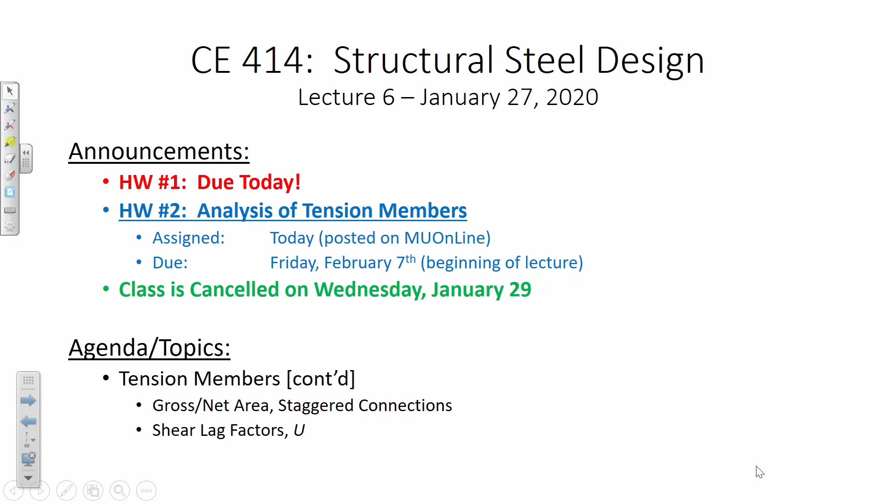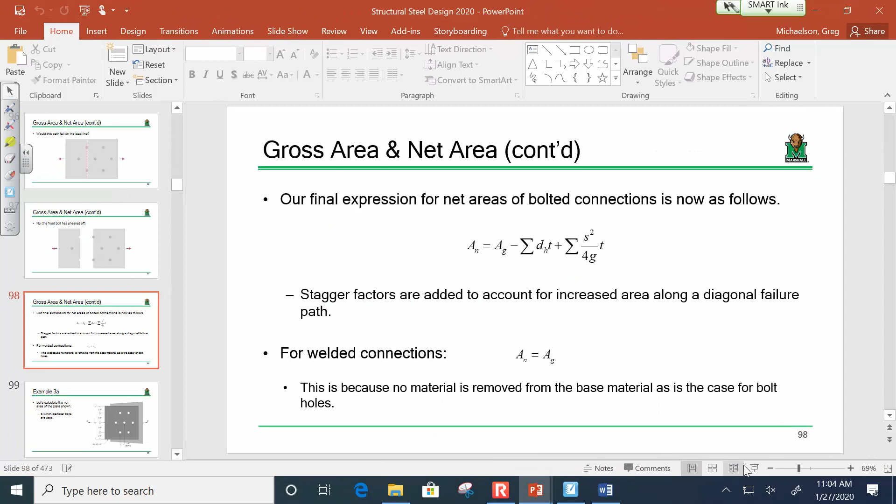Okay, so we're going to get back into section property computation, specifically gross and net area. Let me sort of backtrack. Last time we began the discussion of, well, how do you define the capacity of a tension member? I've got a piece of steel, I'm yanking on it.

How do I determine how much load that member can carry before it fails? Well, it's a function of what limit state you're looking at: the yielding in the gross section, the fracture in the net section, and so on and so forth. But it's also a function of the member itself and its various section properties. Namely, if I cut a section through a member, we're using sigma equals P over A. Well, what's A? It depends on if you're cutting through the gross section or the net section.

Now the gross area is usually pretty straightforward. You either compute it or you look it up in your AISC 15th edition steel construction manual that everybody brought with them today, right? Or you can compute it. That's the gross area. But the net area, there's a little bit more nuance to it.

First off, if you're dealing with parallel bolt paths, you have to recognize that your hole diameter is 1/8 of an inch larger than your bolt diameter because of various reasons we've discussed. Either you have to drill it larger, and B, we eliminate that little bit of a lip of material around the hole analytically.

But then there's also the discussion of staggered bolted connections. Remember, I'll go back a few slides. So we're always checking for a staggered connection along the lead line.

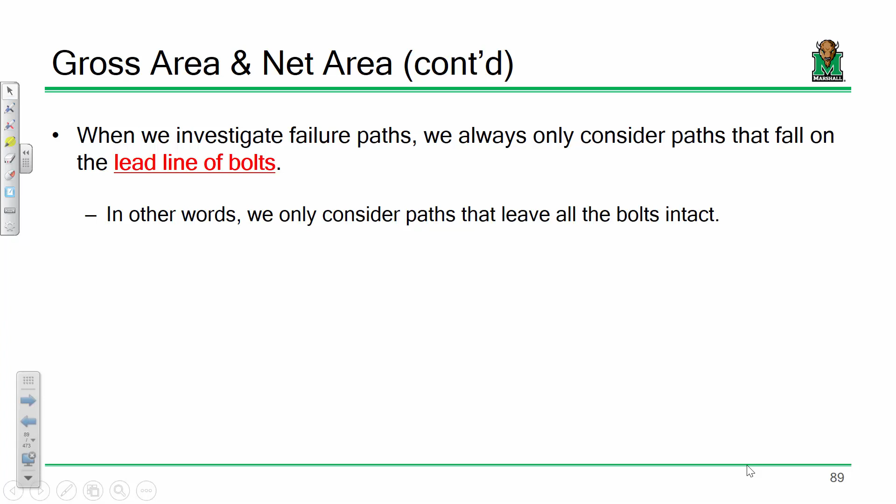Remember, the idea is that here's my tension member, the main body, the gross section, all the way over here. So imagine if you took a rubber band and stretched it along that member.

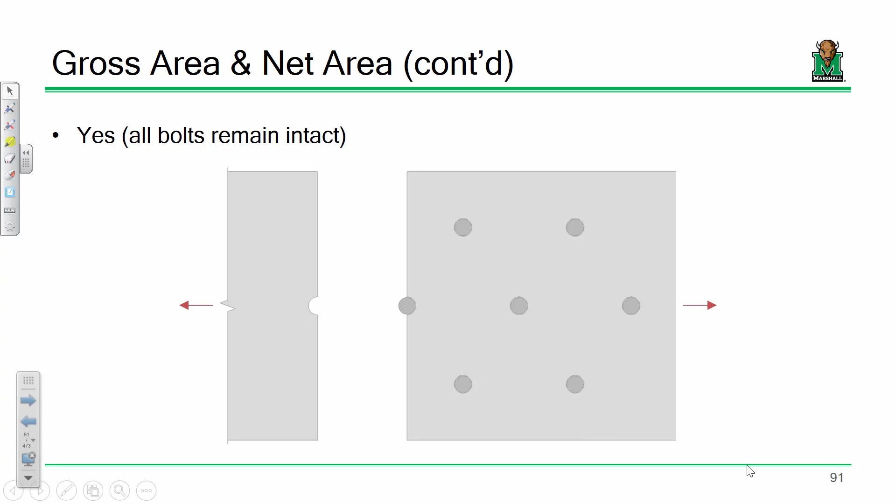The bolts that it hits, those are the lead line. So would this path fall on the lead line? Yeah, because the bolts remain intact. With this one, yeah, because all the bolts remain intact. With this one, again yes, all the bolts remain intact. But with this one, no, because the front bolt is sheared off. So we're always going to limit our discussion to lead line paths. Okay? So far, so good?

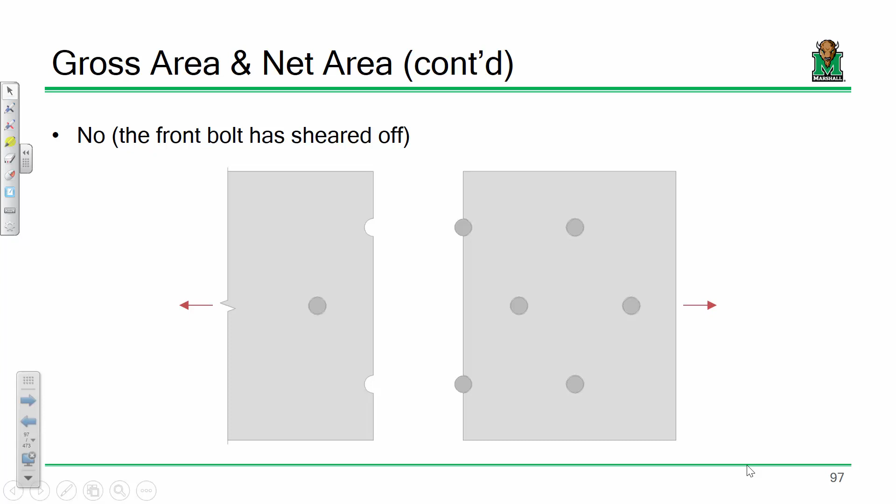All right, now let's see. So here's our fundamental expression for the net area. This is a more general one that you could write down in your notes. I have a summary of relevant formulas here in a bit, but this is one that you could hang your hat on. This is the net area formula: gross area minus the area loss due to bolt holes plus any stagger factors. And we add the stagger factors because a diagonal path would have more area, so it increases the net area. And that's for bolted connections.

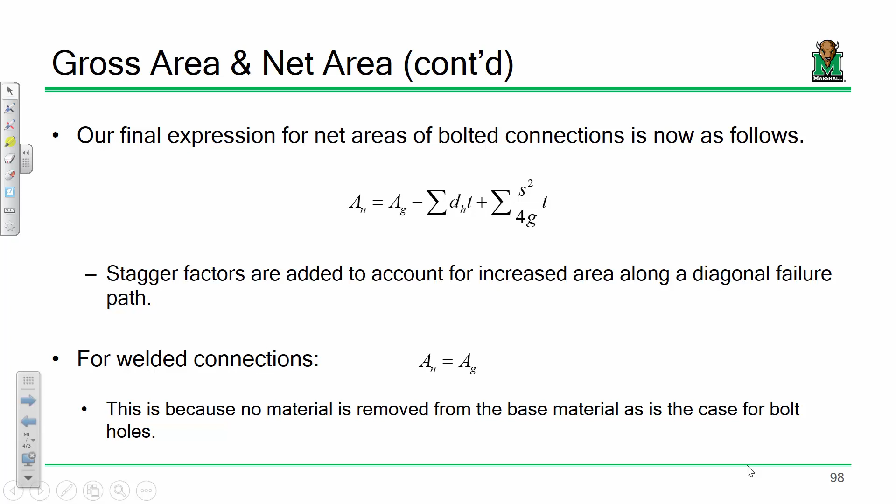For welded connections, as you know, you're not removing any material, and I'm talking about fillet welded connections, the net area equals the gross area. So with that, we've got our net area path shown.

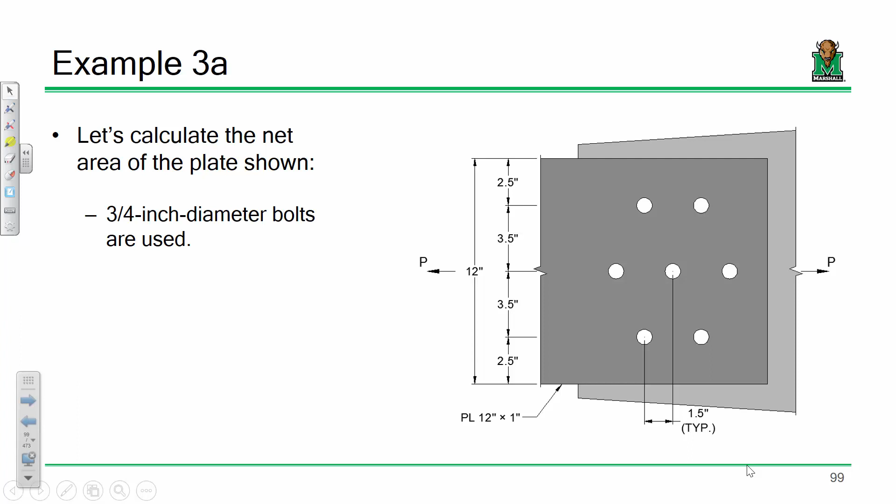Remember, S is parallel to the load, G is perpendicular to the load. So that 1.5 inches, is that the S or the G? Yes, that's S, that's the stagger. So what is the G for these diagonal failure paths? I'm asking you. Exactly right, 3.5. So between bolt lines, that dimension is 3.5, and that dimension is 1.5. Does that sound good?

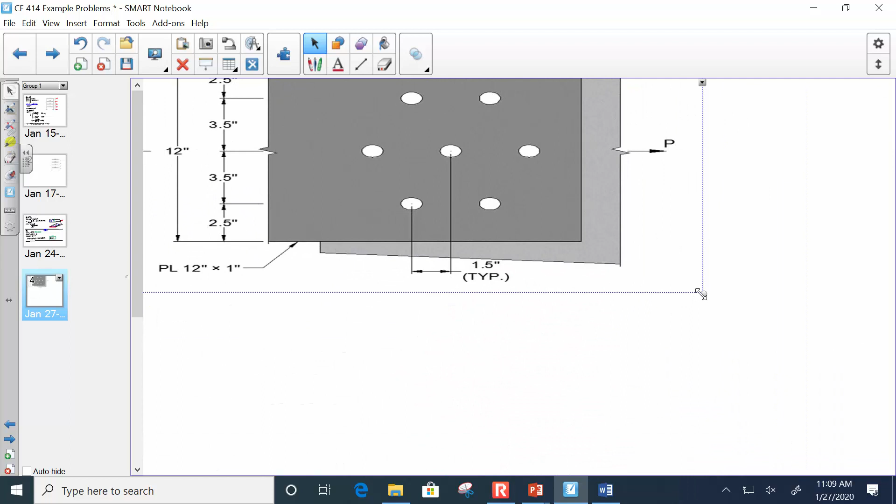All right, all right. So I'm lazy, every time. I'm actually going to stretch that out a bit so it's a little easier reading. Oh my, that's a bit too much. That's good.

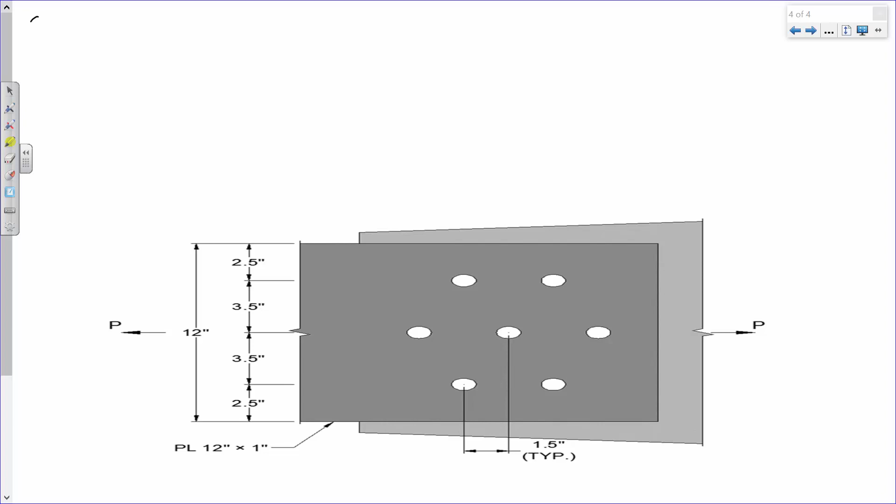Okay, so here's our problem. I'm actually going to move that down a bit. Example 3A. So before we start identifying failure paths and things like that, let's compute a few basic quantities.

Let's talk about the gross area. What is the gross area of that plate? This is an easy one. That's pretty good.

Anybody got it? Let's talk about—all right, so here's the plate. Okay, so let's make sure that we're clear on this. So here's the plate, and so it sort of goes like that. And so what we're seeing is sort of this thing. Right? And so if I looked up top, maybe the plate looks like this. And so here on the end, I've got this whole thing, or that whole thing. And then the main body of the member goes all the way out.

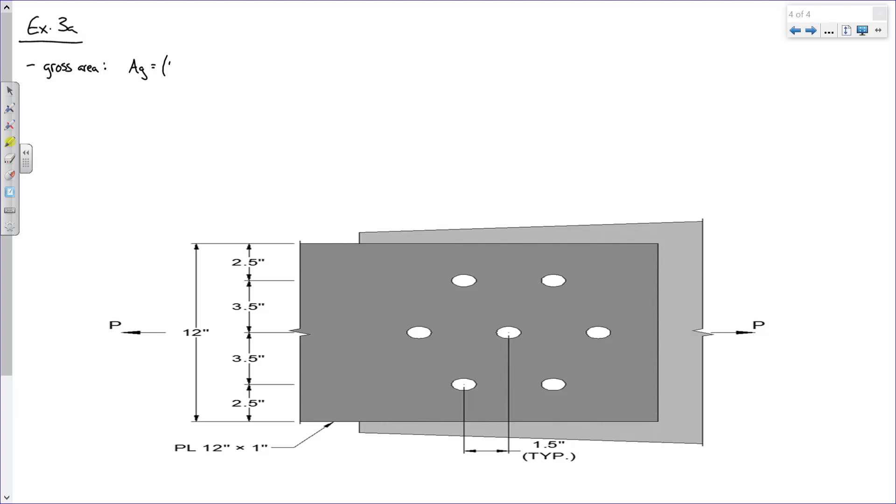Now the gross area, I'm talking about samurai swording or lightsabering through just the main body. So if I cut through that plate and look at it, what is the area of that plate? I promise it's not a trick question. Isn't it just 12? 12 what? Inches squared? Yeah, it's just 12 times 1. It's pretty straightforward, because the plate is 12 inches by 1 inch. I promise I'm not trying to trip you up on that. It's simple. Okay, is everybody okay with that?

Okay, all right. Now let's also look at the bolt holes. So the diameter of the bolts—what were they for this problem? 3/4. So the hole diameter is the diameter of the bolt plus 1/8. So that's 7/8.

And since that's 7/8, what we could also say, if we wanted to make that a little easier, is the area of the hole is the diameter of the hole times the thickness. And we're afforded the opportunity to compute a single hole area because all the hole areas are the same—they're all going through the same plate. If it was an I section or a wide flange, and you had bolts going through the flange and the web, you couldn't use the same quantity because they have different thicknesses. The web might have a different thickness than the flange, but because it's a single plate, they're all the same.

And remember, it's the diameter times the thickness, right? Because if you cut through that section, for instance, you're going to see this plate, but then that area is going to be removed. And the area of that is the diameter times the thickness, okay? So this is 7/8 times 1, and just to differentiate, this is 0.875 inches squared.

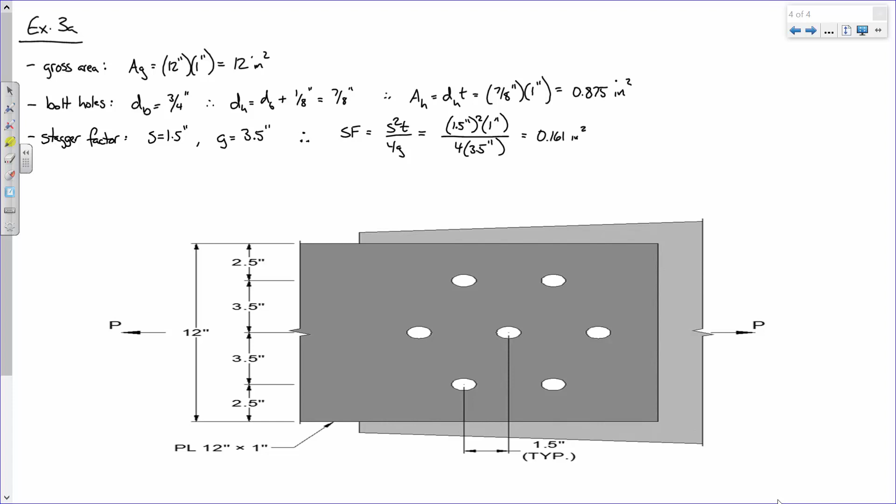Now, what I'm going to do is throw some terminology out, identify a couple potential regions, and you all are going to help me identify some failure paths. So we'll say, we'll call this maybe point A, call this point B, call this hole C, call this D, call this E, call this F, call this G. The reason I'm doing that is because I'm going to draw a bunch of lines identifying all of the potential ways that this could go.

Like we could have maybe some stuff like this, that—a bunch of different diagonal lines indicating where this stuff could lay out.

All right, here's what I want you all to do. Let me move this over. Let's look at possible failure paths. Possible failure paths. I want somebody here to look at this terminology that I've thrown out at you.

Let me be clear. For your homework, like the first problem, I threw out the letters at you. For the second and third problems I did not, so you have to identify this yourself. I'm easing you into it. All right, somebody look at this terminology and identify a potential possible failure path.

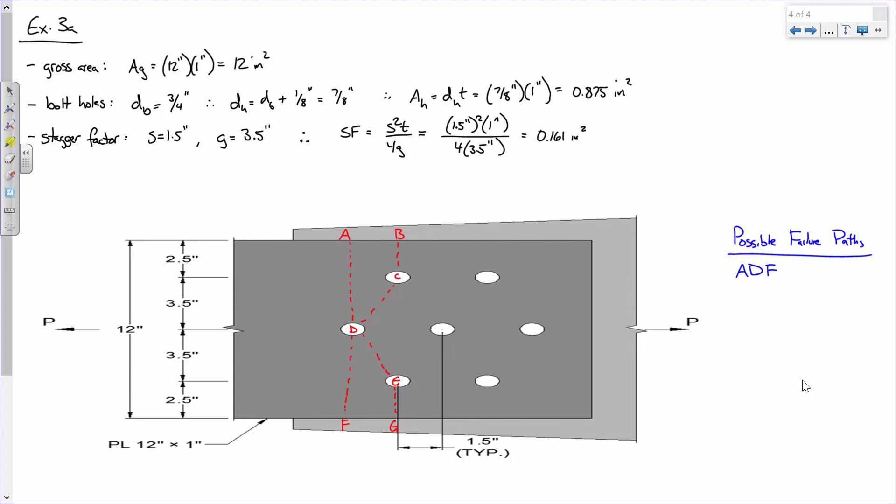A-D-E-G. A-D-E-G, exactly right. Now, analytically, that is different than ADF. Why? Because we have how many bolt holes that we're subtracting for this one? Two. And how many stagger factors? One. Okay, keep that in mind.

Is there a path that's kind of like that one that we could also name? There's A, D, E, G. What about another one? There's one that's kind of like it. BCDF. B, C, D, F. Now, A, D, E, G: how many holes? Two. How many stagger factors?

Now the next one that you mentioned, B, C, D, F: how many holes? How many stagger factors? So are they really different paths? No, in fact really they're the same. So I'm going to say they're basically the same path. Now that is not always the case. Okay, sometimes they wouldn't be the same.

And a particular instance where they wouldn't be the same is if this distance is different than this one. And you're thinking, oh come on Dr. Mike, who the heck would do that? Well, there is a very specific example where that could happen, here in a second that I'm about to show you. So don't worry, it can happen.

Would that 2.5 inch distance affect it as well if it was different? What do you mean, if this was 2.5 and this was 3 or something? Yeah, that's a great question, and the answer would be no, because that's not distance between bolt lines. Because your diagonal path is defined by the 1.5 and the 3.5. So whether this is 2.5 or 76, it really wouldn't matter. But if there was another bolt line down here, then yes, it would matter. That's a great question, so is everybody okay with that?

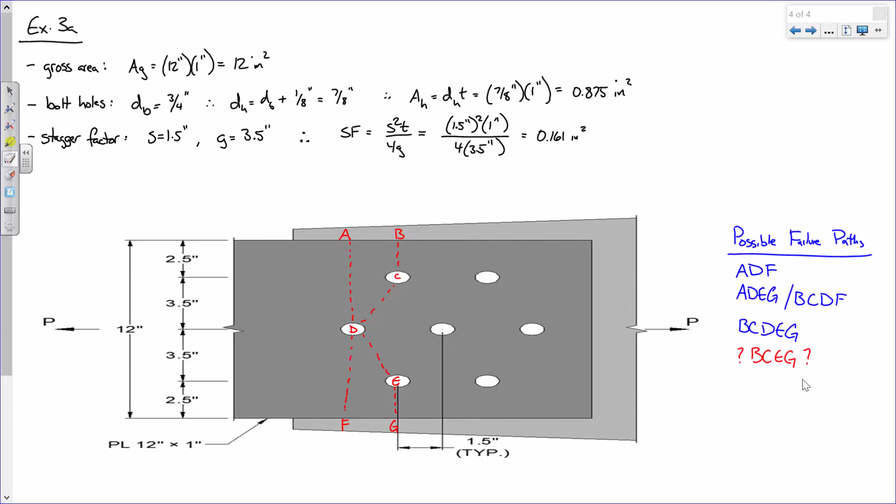Now once you've identified the possible failure paths, the rest of this becomes pretty easy. So watch this, all right? So don't forget, we have a gross area of 12 square inches. We have a hole area of 0.875, and we have a stagger factor of 0.161.

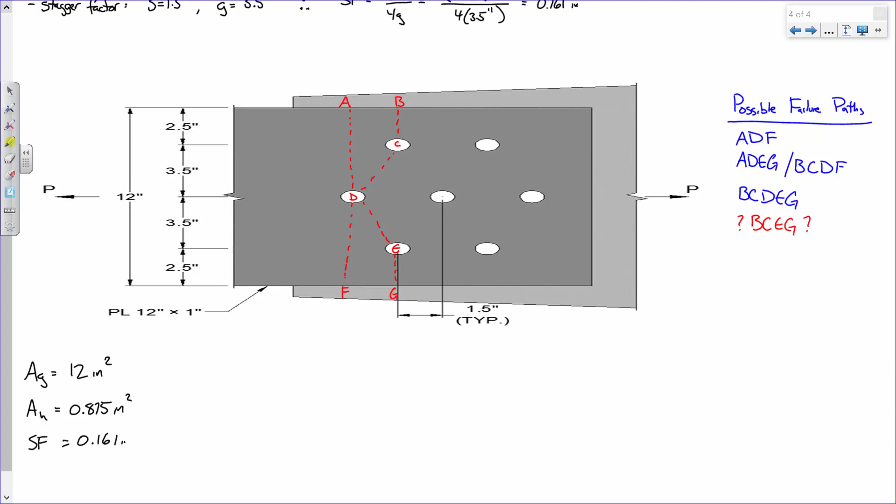Just remember those values, you don't have to rewrite them. I'm scrolling down, so I just wanted to have them off to the side. Okay, I'm going to draw myself a little table. Now remember, the net area formula is the gross area minus our hole areas, plus our stagger factors. I don't need this.

Okay, so here's how I'm going to do this. Let's draw ourselves a little table. All right, and so we had three of them that we identified: A, D, F; B, C, D, F; A, D, E, G; and B, C, D, E, G. And then we have our bolt holes, which were subtracted, and then our stagger factors, which are added. Then we have our net area.

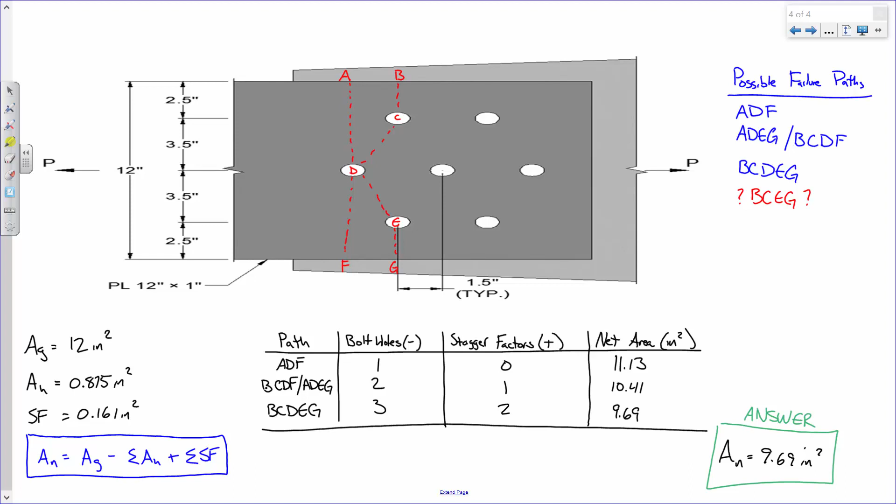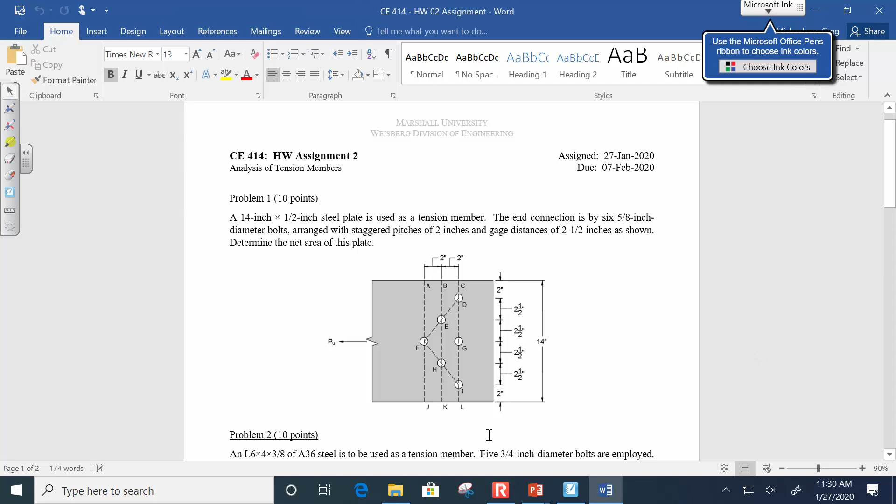Okay, I really want to make sure that's clear, because if you understand this, then the first problem on the homework is straightforward. Here's the problem, and what I did is, for this problem, so that we're all speaking the same language, I label everything. So everything's got the letters, but if you notice on future problems, there are none. So you sort of have to identify it yourself. So it's like this one is so that we can all speak the same language, but in future ones, y'all gotta figure it out on your own.

Does that sound good? Okay, so this one, I'll go ahead and tell you, there are far more failure paths than what we just did. I think there's like six or seven of them. And so the purpose of this problem is for you to identify them all. And so there's a pattern, and you'll start to notice that pattern pretty quickly, and you'll go, okay, I know what the answer is. And that's fine, but it's all about identifying those particular failure paths, okay?

And so that's my first point. My second point is I will go ahead and tell you one hint. Let's say that you're looking at that path. Is it one stagger factor or two? It's two. Each of these is separate, okay? So keep that in mind. You can't use that gauge and that S and compute a single stagger factor for the whole thing. No, each of those are different. And it's because you've got this term squared, the math doesn't work out right. You have to treat each one separately, okay? So I'm just telling you that now so that you're aware of it.

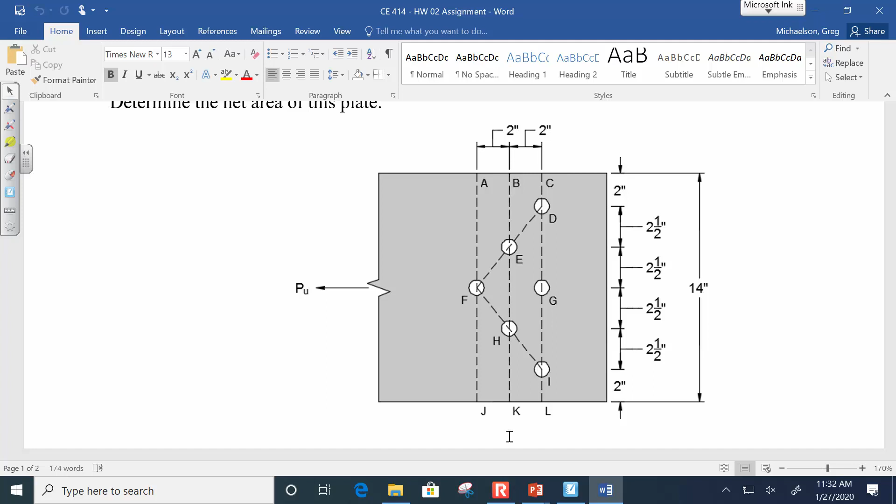Everybody okay with that? Any questions? Yes, sir, on the example we just did. Could you explain again why there was one path that wasn't, like we wouldn't consider it as possible? Oh yeah, okay, I will go ahead and show you why. It's a little weird, but I'll show you why, okay? Here's the idea. This is the idea. And like I said, it's a little weird, so bear with me. Okay, how many bolts are in this connection? Just how many?

Would you agree that each bolt withstands 1/7 of the load? I'll tell you, it doesn't actually work out like that in reality. Anybody who's worked on a lawnmower or done mechanical work knows that if you have a connection with a bunch of bolts, some bolts are more engaged than others. That's just how it works. But for the sake of our discussion, it's close enough.

Let's say we're looking at path BC, EG. That's going to be the gross area minus 2 holes, right? Somebody tell me what that is. I'm just curious.

We got an answer? 10.25, now a second, okay.

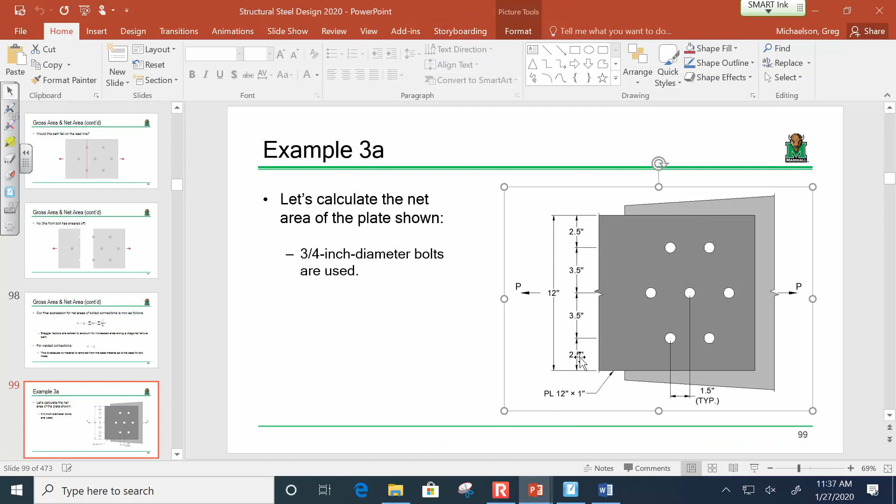Okay, now we did one that's a plate. Now we're going to do one that's a rolled shape. We're going to look at the following staggered connection. This is a staggered connection along an angle. This one's a little weird.

First off, that means we're going to need this, because everybody brought their AISC 15th edition steel construction manual, right?

Yes, it's like, he won't call on me if I sit next to somebody that might not bring one. Still call on me, but at least I'm... No, he was 100% prepared, so I prepared for class stuff. So I didn't sit up there and worry. You're going to do awesome in senior design.

I'm messing with you. All right, so here we're dealing with a rolled shape, okay? This is an angle. We haven't discussed much the terminology behind angles, but there's not a lot to discuss. This is an L7 by 4 by 5/8. So whenever you're looking at angles that have unequal legs, you always denote the longest one first. So it's 7 by 4, the long leg is 7, the short leg is 4, and the 5/8 is the thickness of the plate.

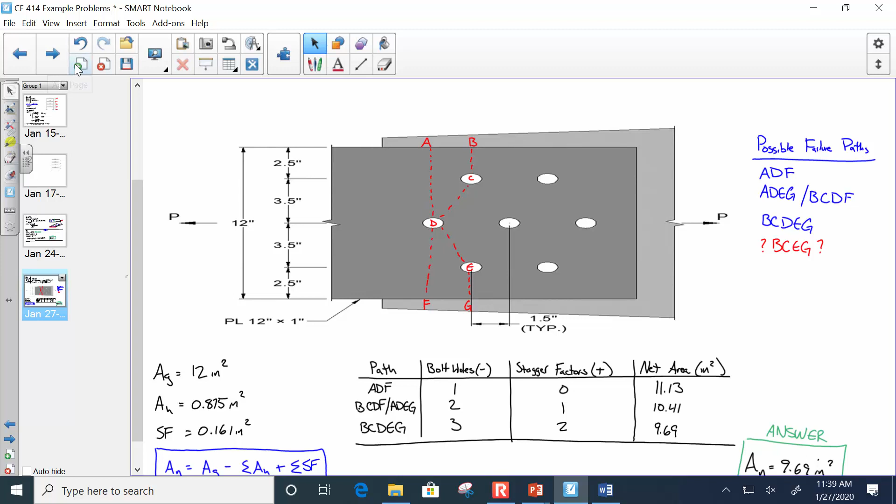So here's how I'll do this. I'll say for an L7. And that's table 1-7 on page 1-44. Now I want everybody to be at the same spot, so I want to make sure everybody's able to find that value.

Again, I know this seems simple, but part of the point of this class is to make sure everybody's comfortable with the manual. That's the whole point. I know it might seem silly that all we're doing is looking at numbers, but by the time we get to week 8 and week 9, we're not going to do this look-it-up-together thing, because by then you'll be pretty familiar with this. So especially, you'll have homework assignments and things like that.

Sound good? Okay, since I don't think we really need to look this up, but what's the thickness going to be for this problem? 5/8. Yeah, it's 5/8. That's the whole point of the terminology. So, not necessary to look that up, but it's there.

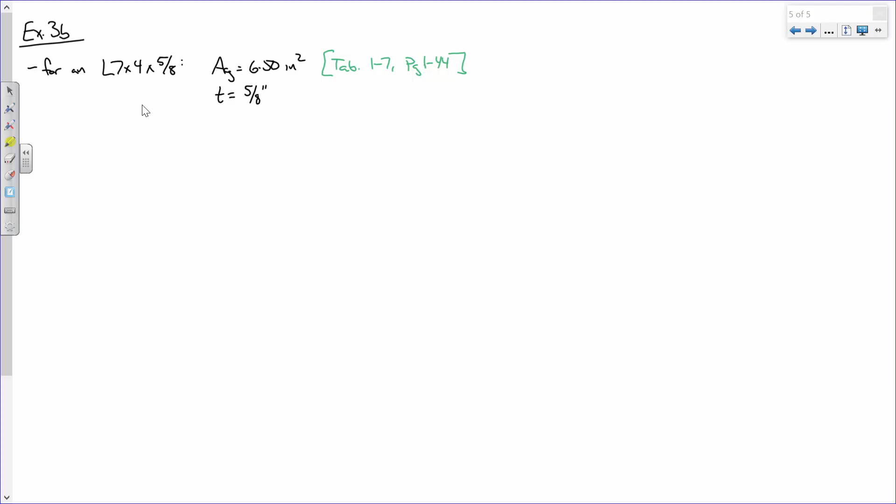So the diameter of a bolt, is it 3/4 inches as well? I think so. So what's the hole diameter? Let's just keep this simple. 7/8.

So the hole area is the diameter of the hole times the thickness, so 7/8 times 5/8, and that equals. And when you're doing your homework, I'm okay if you do this all in one calculation, like 3/4 plus an 8th times that. You don't have to follow this format, just as long as you do it correctly and do it neatly. As long as you do it correctly, do it neatly, and use the right terminology, I don't care how you do it.

So we'll say 3 decimal places for our purposes here. The only reason I say 2 to 3 decimal places is usually because that's enough specificity so that we know what number we're talking about. Like if you just said 0.5 or something, it'd probably be good enough for design purposes, but then there'd be a bunch of 0.5s running around and we wouldn't know what value we were talking about. So 3 decimal places, what we got?

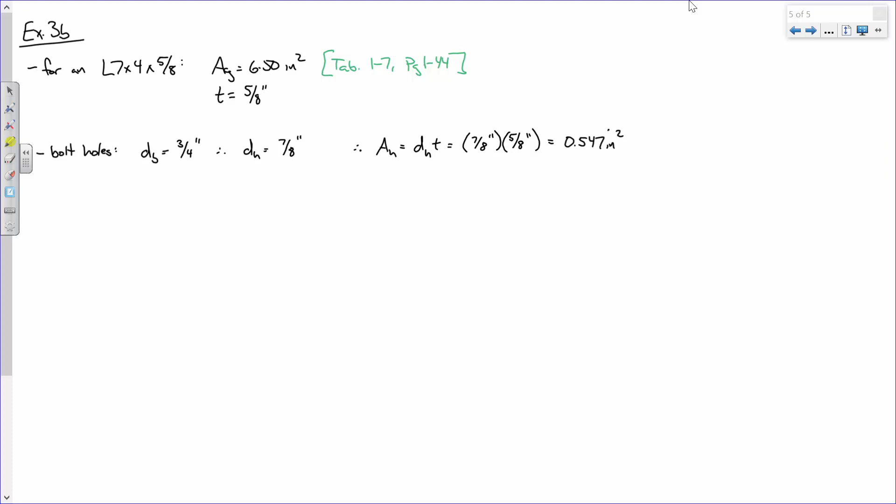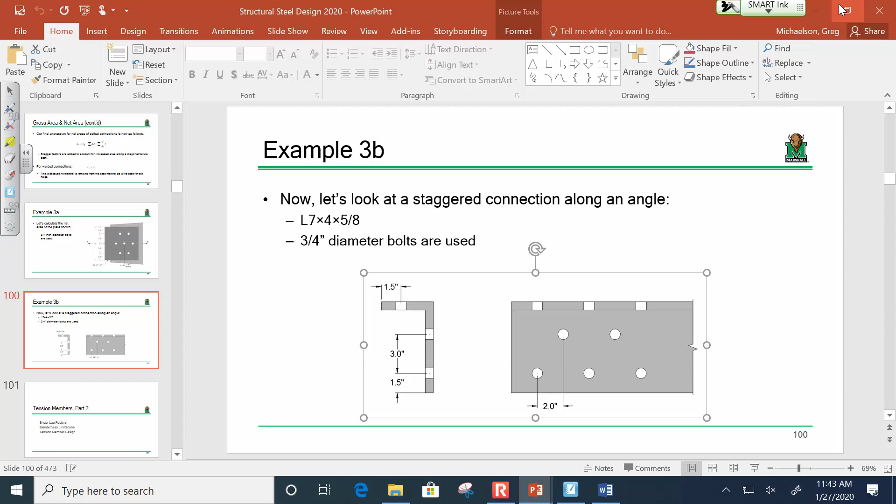Okay, now this is where things get a little funky. And we're not going to finish this problem today, but I'm going to show you what we're going to do, and then we'll digest it. We'll tackle it on Friday.

What is the S value? 2 inches, right. Okay, now does that matter whether or not I'm talking about this path or that path? No, the S value is always 2 inches, right? Now the gauge distance, though, that one's a little unique, isn't it? What's the gauge distance here? Exactly 3 inches. 3 inches, exactly right.

What's the gauge distance here? Is that the 1.5? No, it's not. The 1.5 would be sort of from here to the edge. I'm looking for a gauge distance across here. That's a little weird. How do you do that? Because it's the stagger across the legs, right?

That's a little strange. So, because it's a little strange, I am going to make it not strange. And how am I going to do that? I'm going to break out the samurai sword or lightsaber. And what I'm going to do is, I'm looking over here, I'm going to samurai sword or lightsaber through there, and I'm going to take this and stack it on top. And I'm going to turn this angle into a single plate. I'm actually going to perform some surgery to this angle, if you would.

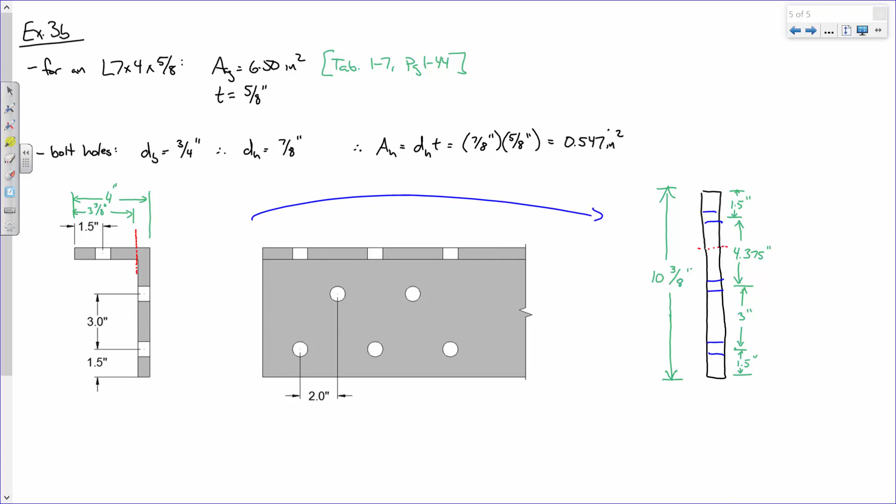Don't worry, we're not done with this example, we're going to continue it on Friday. I just want to point out something really quickly before we close it, just to show you a shape of things to come.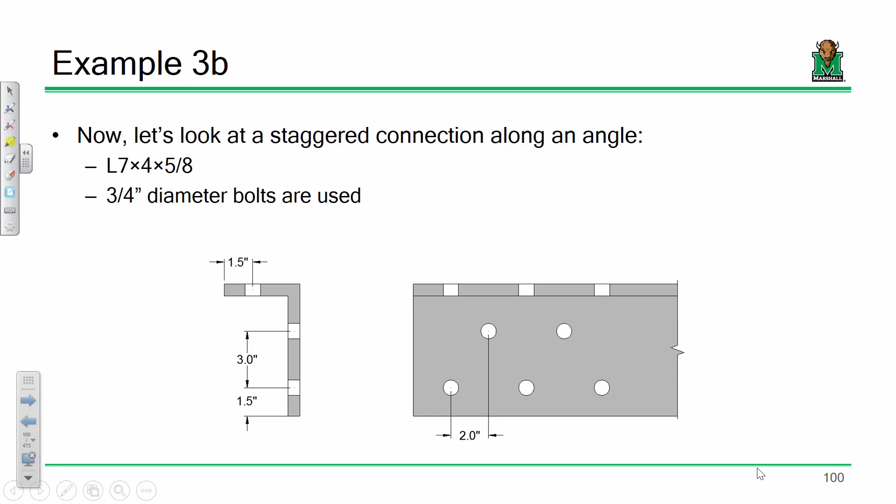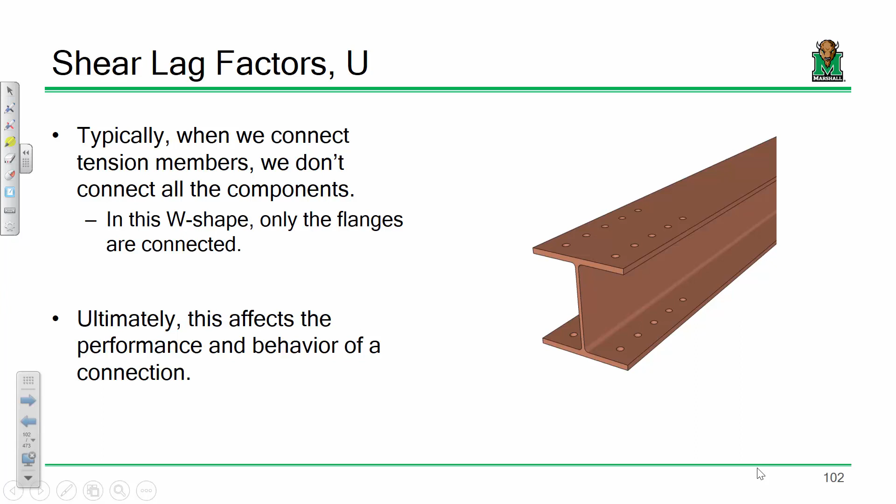What we're doing right now is all about gross area and net area. I told you that when you take your first exam, there's two things that's going to confuse you. One of them is net area, the other is shear lag. Shear lag is something we haven't talked about yet, but we're definitely going to dive into on Friday. In a nutshell, shear lag factors are basically trying to account for real-life behavior on a connection. When you look realistically at what the stresses look like along a connection, they're weird. They're not simple, okay? They're all over the place.

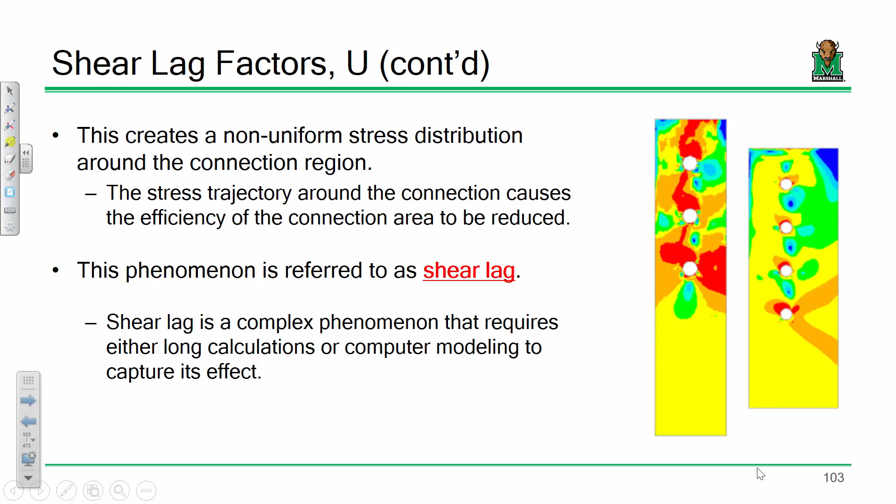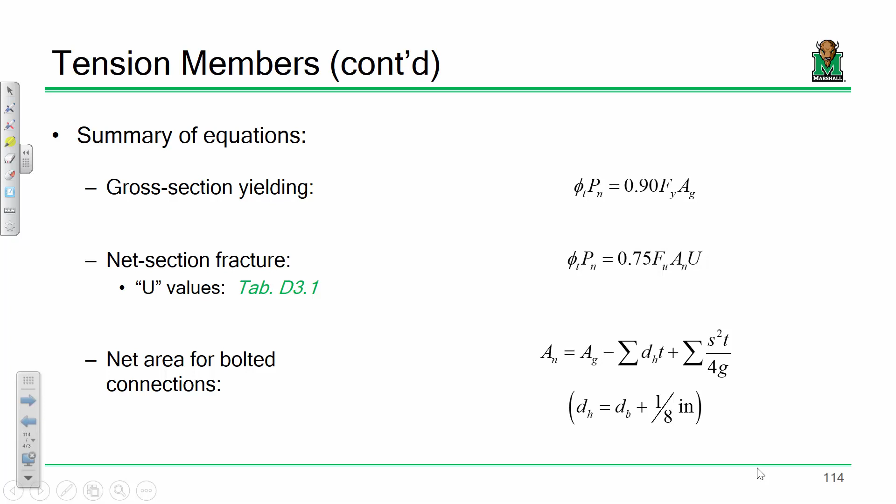And so we adjust that through the use of what's called a shear lag factor. We're going to talk about shear lag factors on Friday, and once you have shear lag factors and net area, you've got tension members pretty much figured out, and we can start getting into full-blown examples.